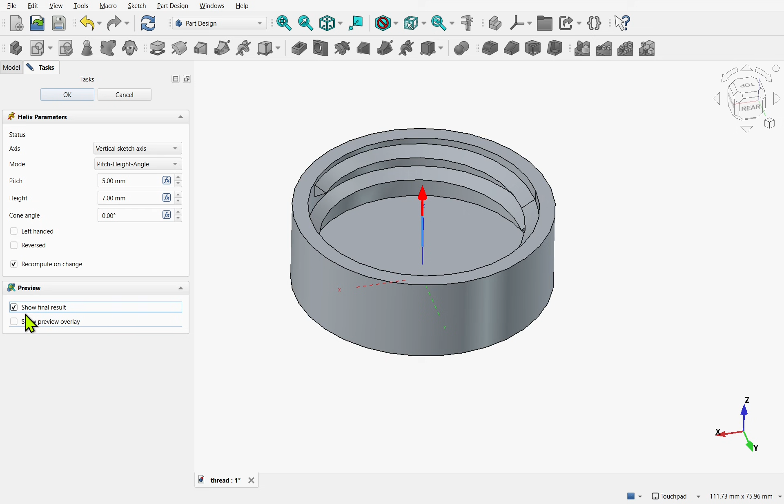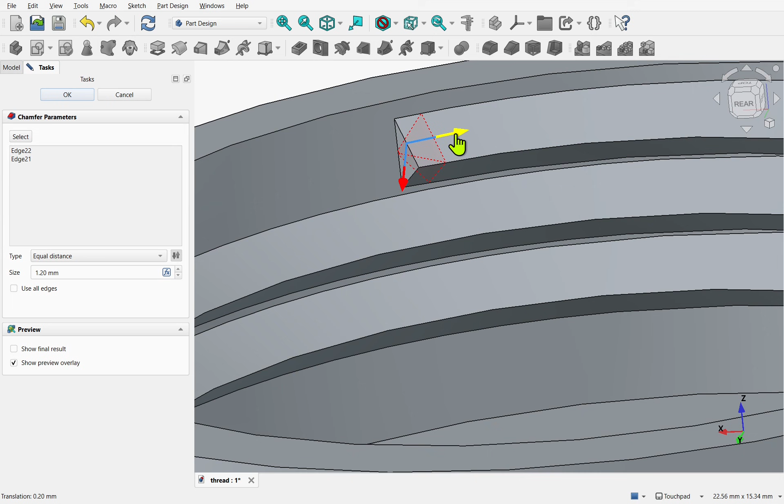If you're manually creating custom threads in FreeCAD, you hit the same problem every time. Your thread has no lead in or no lead out. The thread looks fine, but in real life it's a pain to assemble, as there is no taper to guide the parts together. We need something to give the mating thread something to naturally engage with. Most people try to fix this with a chamfer or fillet. Sometimes it works, most of the time it doesn't. Geometry breaks and the transition just isn't correct.

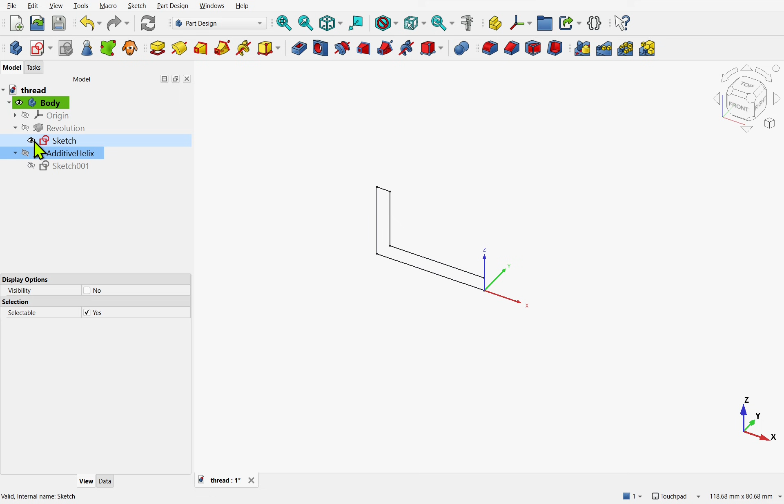So let's look at two simple proven solutions that work with minimum fuss. Starting with a simple sketch of a lid that's been revolved, we add a basic sketch of the profile. We'll add this on the same plane as the seam line. This is important as we can use this to our advantage.

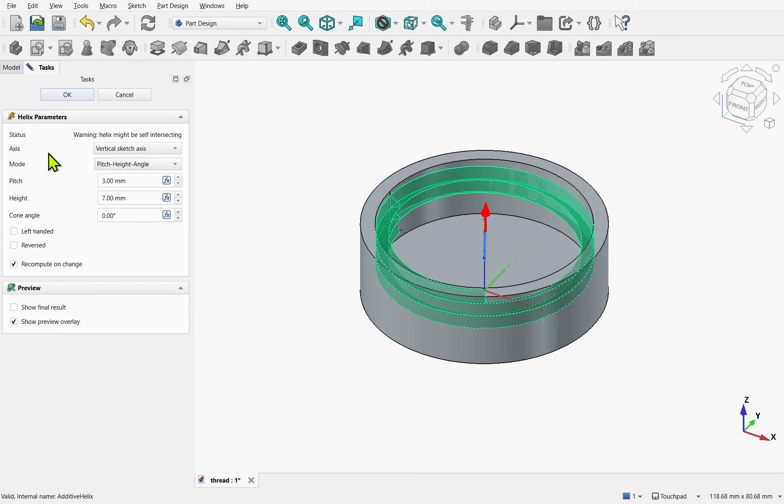By creating an additive helix, or subtractive depending on the application, this will create a thread. Note, if the thread fails, this is normally because FreeCAD can have problems with the thread starting on the seam. Solve this by altering the angle in the attachment of the profile by a fraction of a degree, and all is well. We have our thread, but what about the lead in and lead out?

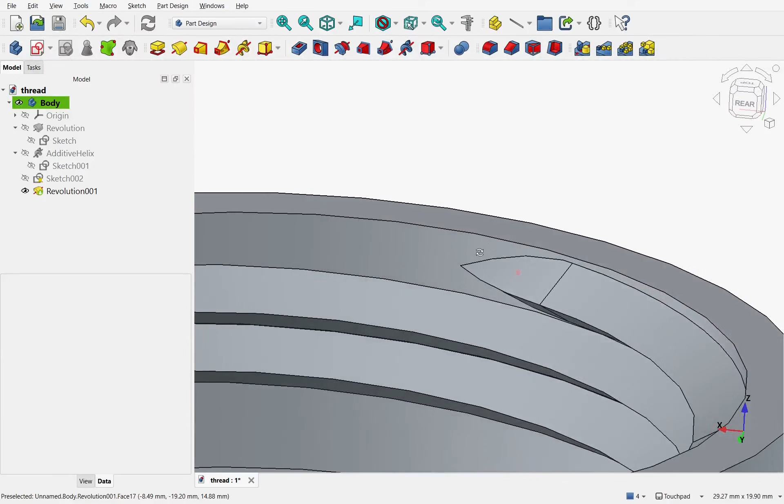For option 1, the idea is simple. In this case, we'll take the end face of the additive helix and revolve it. This creates a bullnose style start or finish, similar to that in jars and bottles. Problem is, you need to rotate around an axis, and we're working away from the origin. There won't be a convenient one to rotate around.

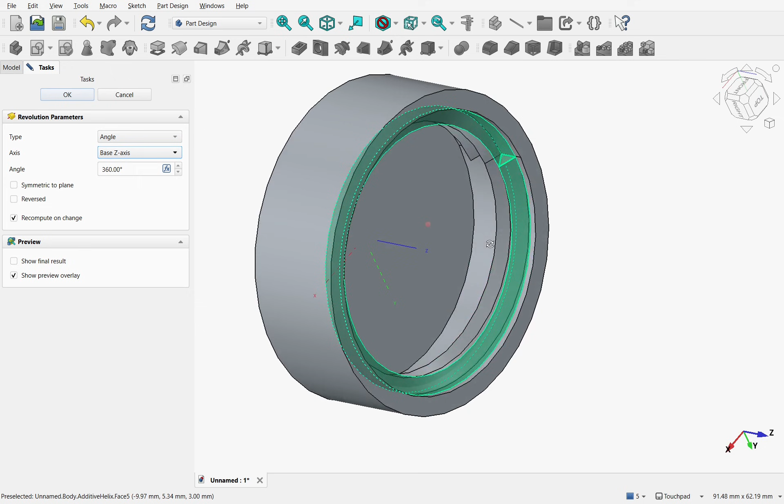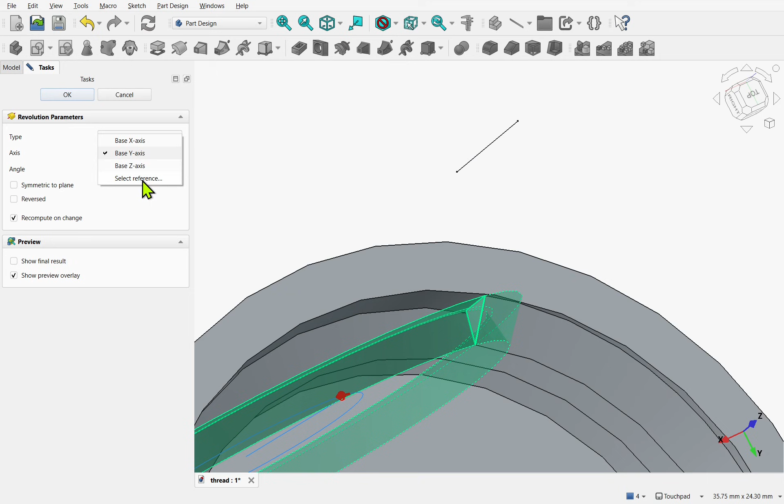This is where the seam line comes into play. Select the face, create the revolve, and then select the seam line as a reference. Back the rotation off so it enters the main volume of the lid, but doesn't come out the other side. There are other ways of doing this, for example, using a simple sketch with a single line or datum line.

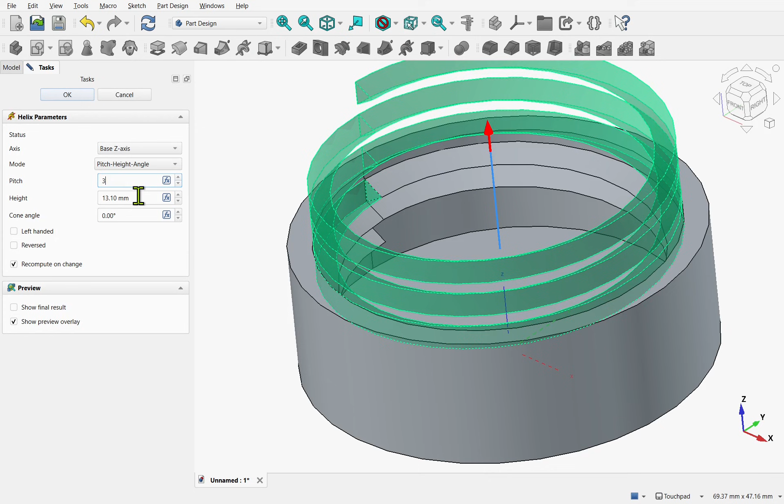For option 2, we can add a secondary helix. The difference is that it creates more of a lead in or out, like you see on bolts and screws. Again, we just select the face of the helix, and then we create an additional helix and modify the properties. By increasing the cone angle, it blends the thread into the material, creating a proper taper lead in or lead out that behaves like a real manufactured thread.

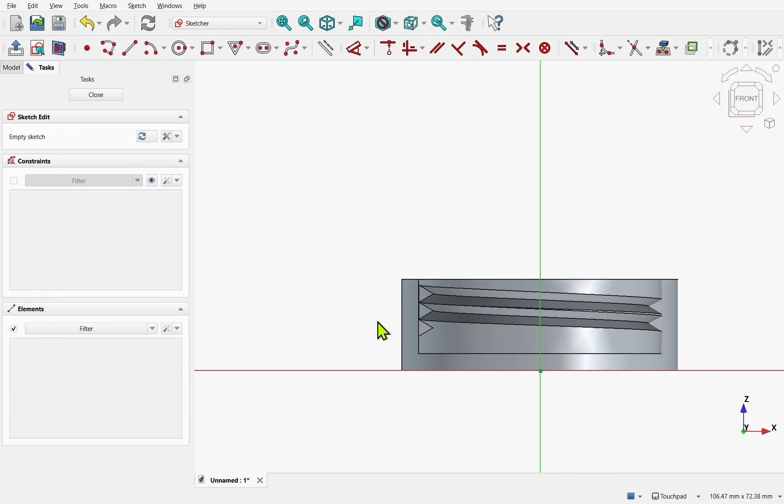Both methods can generate extra volume on the opposite side of the part, especially if the walls are thin. This is normal and the fix is simple. Use a groove operation with a basic profile that follows the outer surface. This removes the excess material and leaves a clean, functional geometry.

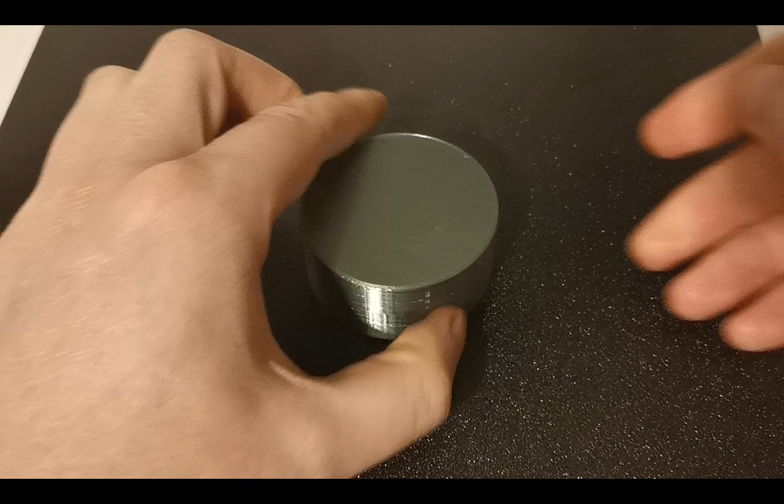So there's two solutions for lead in and lead out. We'll go more in depth in the step-by-step tutorial in another video. I hope you enjoyed that video and I hope to see you in the next one.